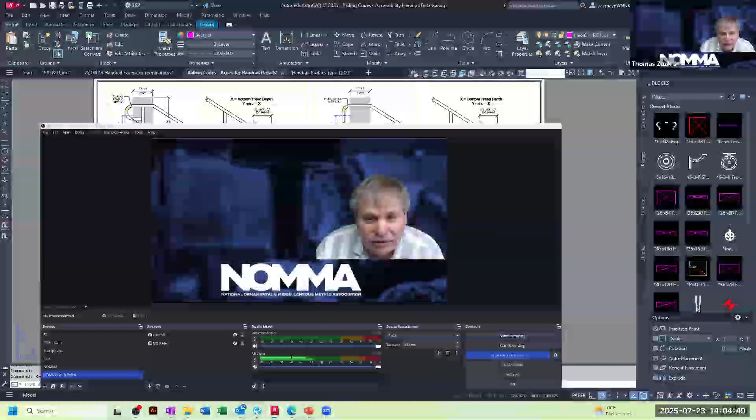So with that, one of the areas that I'm going to start with that is a huge hot topic is handrail terminations. Now, what you're looking at here is what I try to explain to clients, which are NOMMA members, mainly, what you need to do to be able to present multiple different aspects of terminations to your clients. Whether it's commercial or residential, your terminations are going to be very similar other than where they terminate.

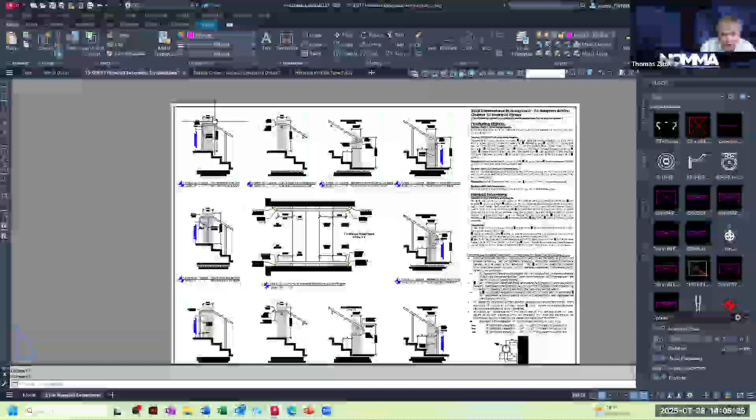So this page that you're looking at here is a breakout page of a stair flight with mitered returns and radius returns, and it is a breakout of all similar type terminations. Like if you have a radius bend commercially, per the ADA and pretty much most building codes today, and NFPA 101, you need to go your 12 inches at the top of the stairs before your inside of your radius starts to bend for your change of direction.

Same thing goes when you return it to a wall. At the bottom, here's a radius bend to the floor, radius bend to a post back.

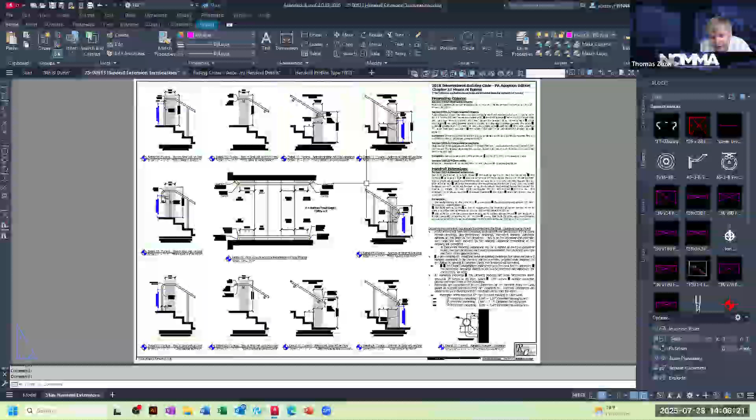And what this is that I've produced here for a client is a standardized page that goes in with all their submittals so that when they're being reviewed and the architect or the designer or anybody on the site, the contractor, looks at it, they know that you have taken the time to review and laid out your handrail terminations so that they comply to code.

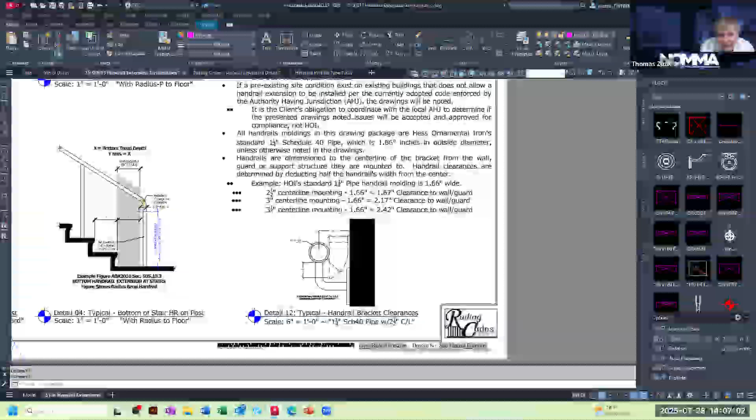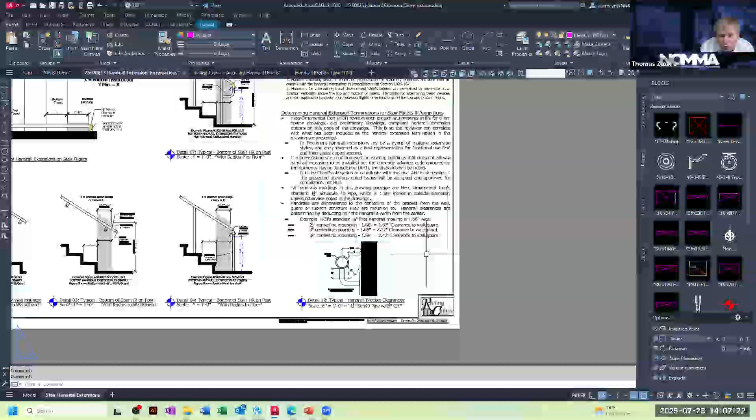For this client, we have the code adoption section plus the ADA plus, I'm not sure how many of you are familiar with handrail bracket sizing and the clearances, but the ability to list out this information. Now, why is this important? Areas of the country like Maryland, Georgia, Florida, I'm not sure how many of you on here deal with NFPA 101, which has got a 2¼ inch clearance between the wall or your obstruction and the inside of the handrail bracket.

One of the biggest problems that I run into when trying to help out fabricators is understanding that when an architect draws these details, you need to communicate that you're working off a center line, because your bracket standards, unless you're custom making them for the architect, pretty much most of you will probably see a dimension here from the side of the handrail to the wall or the guard or whatever it is that says 1.5 inches. And that's an incorrect way to designate the way that the handrail clearance is being reviewed.

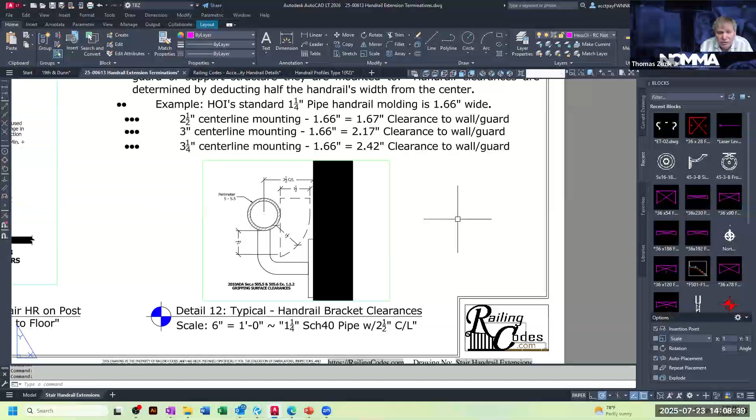And why do I say that? Because it's a minimum of 1.5 inches clearance. And most off the rack brackets that you all are working with start at 2.5 inches, go to 3, go to 3¼. Your larger 3 and 3¼ are going to be for when you run into NFPA 101 and you need a 2¼ inch clearance. Because if you're using a standard 1.25 inch Schedule 40 pipe for your handrail with a 1.66, which is what this is based on, and you have a 2.5 inch bracket, you can see here that you have the clearance of 1.5 inches plus.

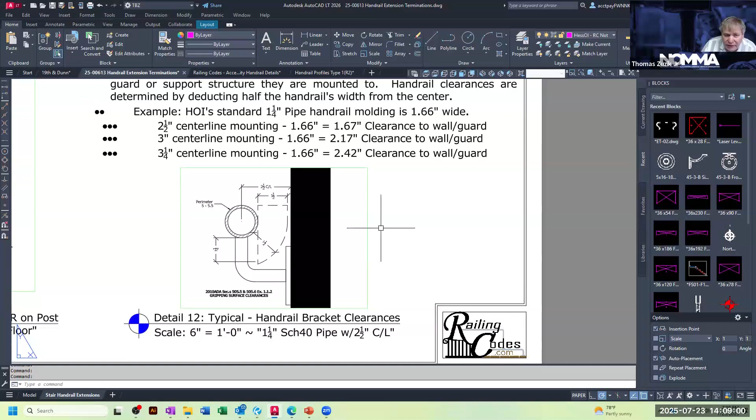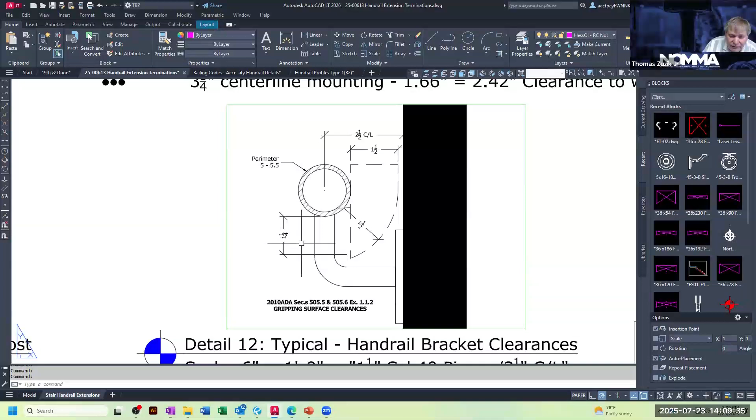And we'll get into this little radius portion down here in a little bit, but one of the other parts of the code and ADA and ANSI A117 and in NFPA 101, that's my reminder, I'm late, is that as your perimeter grows, every 1/2 inch over 4 inches, this height here at this measuring point for the clearance reduces underneath from 1.5 inches minimum to 1 and 3/8 inches to 1.25 inches to 1 1/8 to 1 inch, depending on the dimensions. And we can go over that if you have some more questions on that.

But this type of page in your submittals, when you're looking at your handrail terminations, will drastically reduce, giving your client and the reviewer at the architect of record, whoever's reviewing it, or the engineer, the building official, whoever's reviewing your documents, the knowledge that you have listed out and referenced back for your pieces.

Now, it's important to understand all these different terminations and how they affect, because some of you may have a mandrel bender, some of you may have a manual bender or a Hossfeld, and your radiuses are going to be different. But the key is to remember that your clearances, which are your minimum extensions, have to be met before you do those changes in direction.

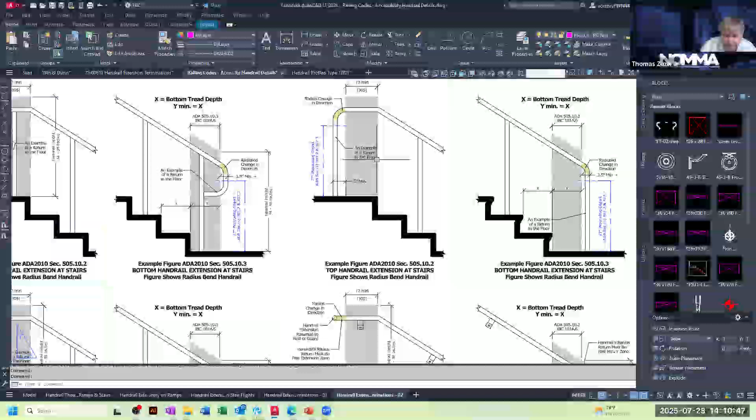Now, I'm going to give you a little bit of what I call an overload. This is the 2010 ADA, the 2017 A117, and pretty much anything that you're dealing with newer IBCs past 2018. But this is showing a stair flight that's got an open tread on the side and showing that these darkened areas here are on the landing. This is on the landing, this is on the landing. This line here is your break. This line here is your break. This is your landing. And this is showing all the pieces that you can go together.

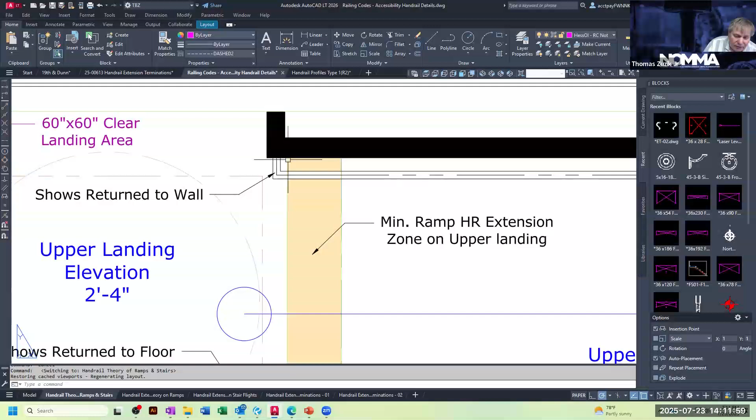One of the biggest issues that we find in reviewing that a lot of you run into is when you're at the top of a ramp, they don't give you this landing zone to clear with your handrail to the inside. And they normally will give you 12 inches from the break line to the end of the wall. Well, your handrail has to project past that because you have to get the clear of the handrail past that zone. Another important piece to understand is if you're dealing with a stair flight and a ramp that intersect, this is another one that a lot of people miss and get into trouble with.

How many of you actually know that you cannot connect the handrail of a stair flight to the handrail of a ramp that is in the means of egress for ADA compliance and A117? It is against the federal code and the law, and it is against A117.

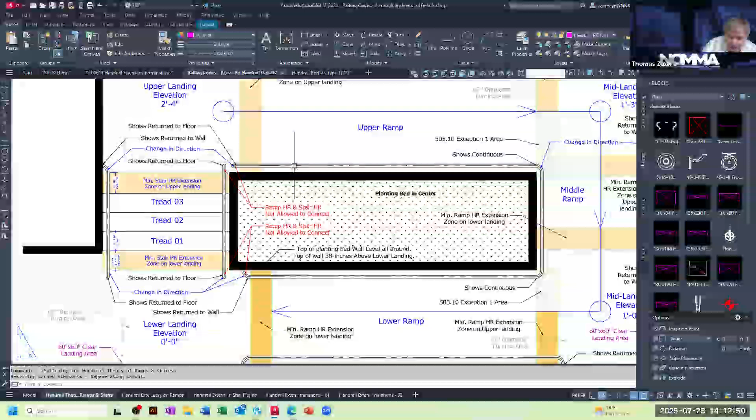These breaks are required so that the blind or the visually impaired know that they're done at the top of a ramp. They can be continuous from ramp to ramp to ramp like you're seeing here, but they cannot be continuous to a handrail. You can't connect the handrail of a ramp to the handrail of a stair. And I'm sure a lot of you work in areas where you have ramps that run around like this and tie into stairs, and they want you to connect. That is a compliance issue and one that is very largely missed out there.

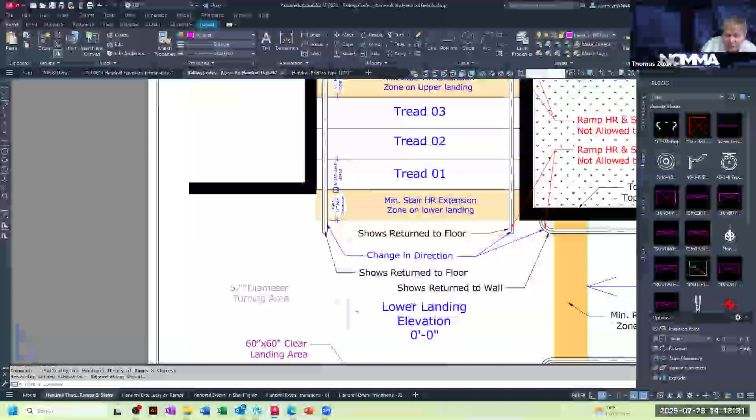Another one is where the bottom stair riser, your nosing point, is right at the point of a stair here, and then the return of a wall, and the architects will turn it before running it 12 inches, and it is not compliant. It needs to go out.

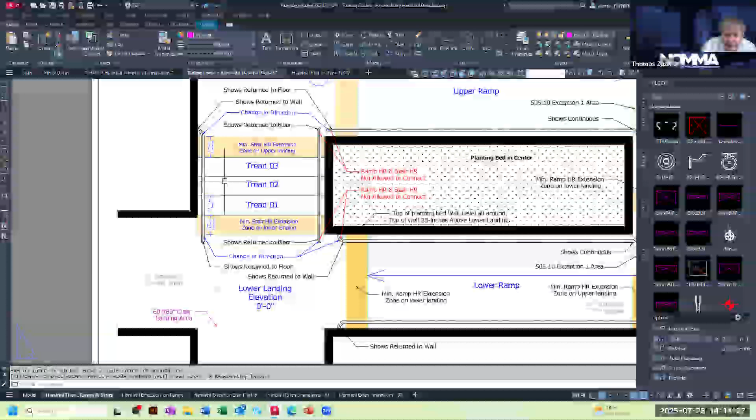Now, why is this important? Well, if the firm you're dealing with has a non-compliant design and you bid it and put it in, you own it. And as a fabricator, you need to understand that very strongly, that you're the professional. You need to know the difference between doing it right and doing it wrong. Doesn't matter if the architect drew it wrong. Doesn't matter if the building department didn't pick it up upon review. It matters how it's built and how it's installed. So it's important that you understand these termination points.

Okay. So where is that? Well, here's one on a ramp that you'll see a lot of times. Come down, point. Here is your compliant handrail extension. Here is your non-compliant handrail extension. This is no good.

Somebody chime in there? I don't see any hands.

Okay. Here's another one. This is an important one that a lot of people miss on. If you look here real tight, you'll see that this radius is turning into the wall before you've reached a minimum 12 inches. This is not...

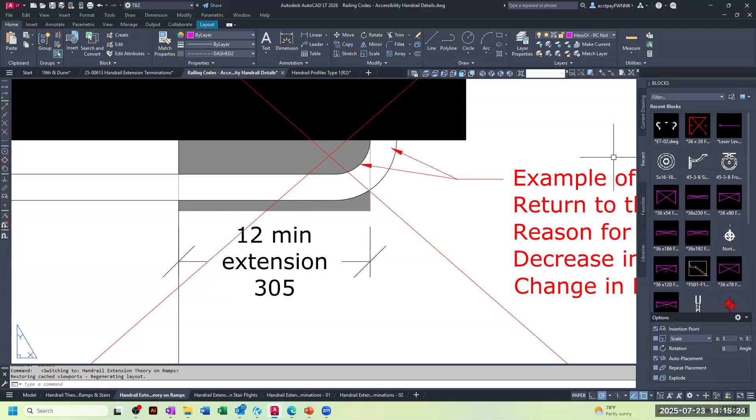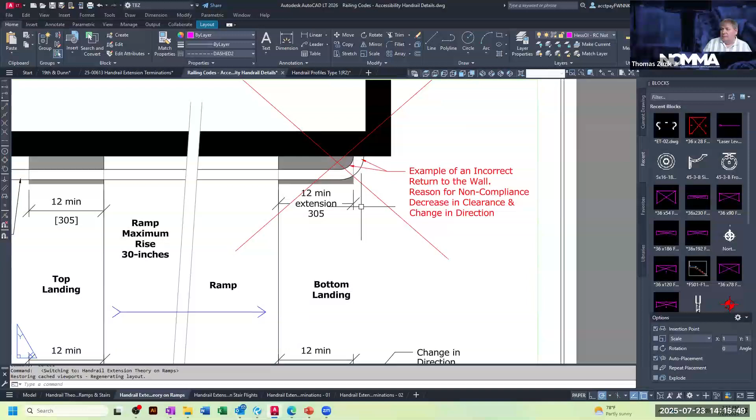So it's important that you understand that this is a huge factor that will come up. You may get past the architect, you may get past the builder, you might even get past the building department. If somebody falls, you're going to be on the hook for the non-compliance down the road. Okay, so it's very important. I get calls or emails on these at least twice a month for how do I talk to them to explain it.

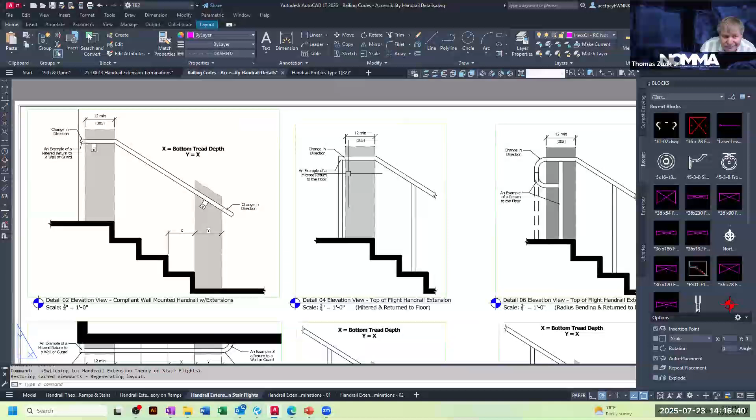So mitered handrails will get you a closer reduction because you don't have the radius, but they also give you this point, which is not good either. It's a trade-off. I always suggest a radius bend if you have the ability. If you don't, and you need the room, you can tie it in and miter it. It's not wrong, it's just playing on the safe side.

And here's an example of two compliant ones. Here's a mitered bend right to the wall, and then here's one that doesn't even go. There's ways to play with the different types of handrails, extensions, and radiuses, but for the most part, they're all the same. This is our handrail clearance, and these are the stair flights.

Before I move on to the next topic, I think Greg Terrell emailed me the question on the next topic I'm going to cover, which is stair width and stair flight width and handrails and clearances. But does anybody have any questions, or am I boring you because I've given this to you 18 million times? Can you hear me? Yes, go right ahead.

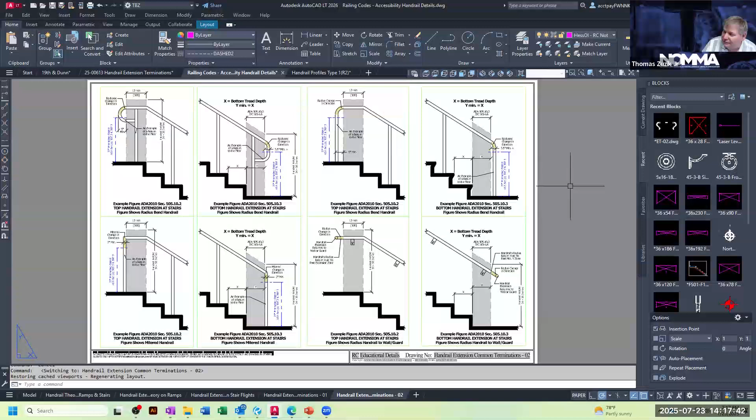All right. Can you go over the specific verbiage in the code? Because this comes up a lot in our industry where they don't give us enough room for that 12 inches. And if we have enough room, we try to go the 12 inches before our return to the wall. But I've had architects and GCs argue with me about the IBC code or the ADA code not explicitly saying that it's a turn in direction in the handrail.

Technically, they argue that the handrail is still extending forward in the direction of the ramp because the verbiage in the IBC code says the extensions of handrails shall be in the same direction of the flights of stairs at the stairway and ramp runs at the ramps. They argue that bend is still going in the same direction as the stairway, and as long as the bent area is still above 34, within that 34 to 38 handrail height, even if it's within the bend downwards or toward the wall, that is still code compliant.

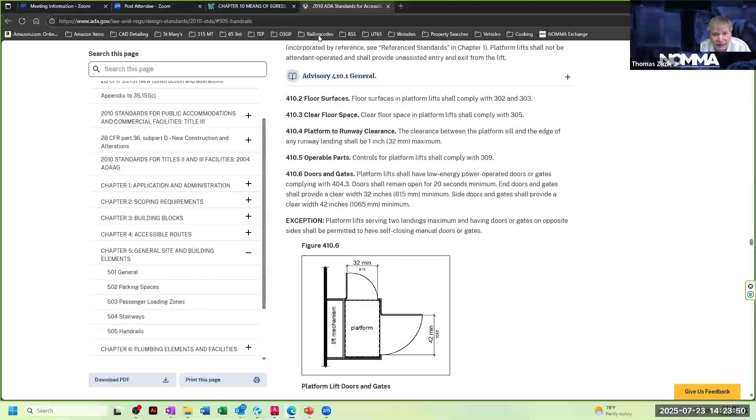Now, if we take this information that we just spoke about, and we interpret the change in direction, and then we go to the Access Board, chapter 5, stairways.

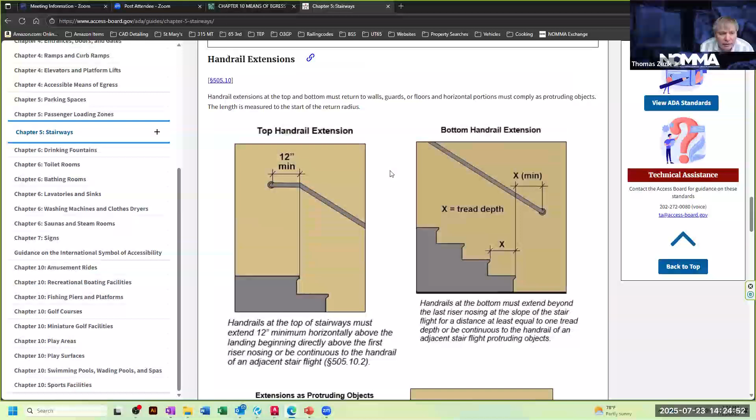Sounds good, because we have it, they push back a lot on this, and I've actually had people make pretty good cases that the handrail return to the wall, technically the railing is still continuing in the direction of the ramp or the stair, and that graspability, the IBC 2024 code that you brought up before, does attempt to clarify that.

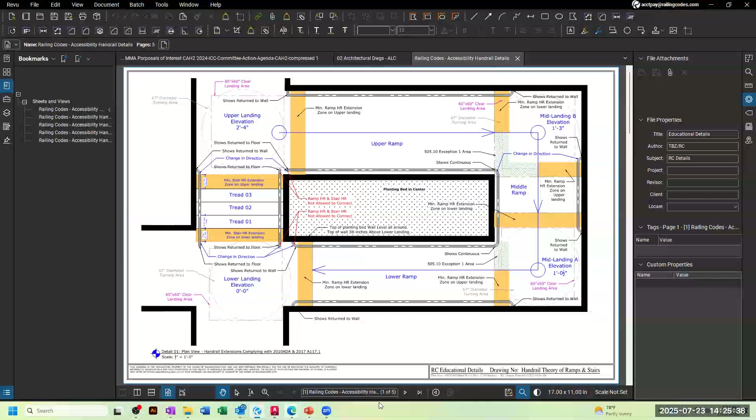Just so you know, it does actually have that, if you jump back to that IBC code you had up.

So it says, shall extend the required minimum length before any change in direction or decrease in clearance required by those sections. If you go to section 1014.8, it actually has an exception for the decrease in clearance due to the curvature or angle of the handrail returns shall be allowed.

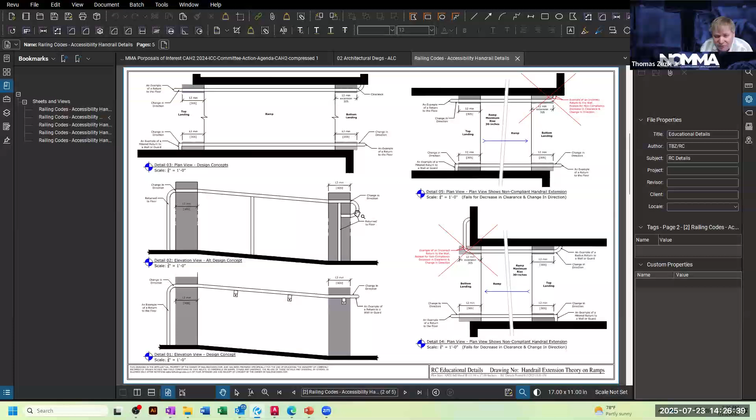That was clarified in the last code cycle and removed. Just so everybody understands, I'm working with the editorial committee for ANSI A117, and the figures you're seeing here will be in the next publication of the A117, showing that you have to make these before you hit these clearances. So this is not new, it's editorial, meaning it doesn't have to go through the code review process because it's editorial to be closer to the text.

And figures are non-enforceable. This is an important part for everybody to understand. Figures, which these are, are not enforceable for the ADA, A117, the IBC, or any of that. It's the text. And that's what the architects don't seem to get, they try to poke holes in the text versus understanding what the actual text says.

And they can say, okay, well this is the way we interpret it. And when you say to them, that's an incorrect interpretation that we know through talking with the code consultant, are you willing to go out on a limb and bet your reputation on it? Because the lawsuit's coming to you. And 9 times out of 10, which is why I go back to, if you give them...

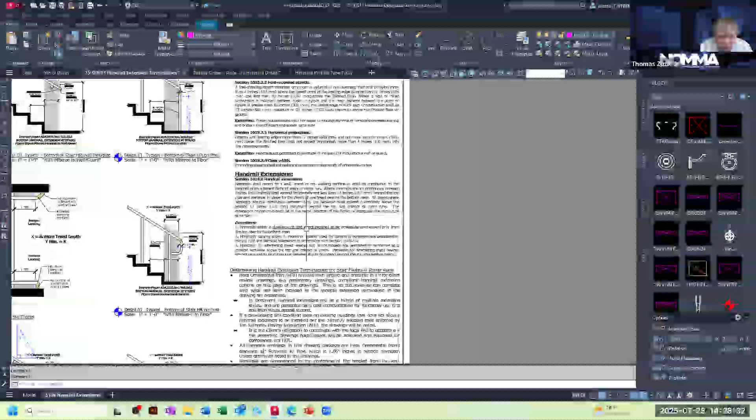If I can find it... oh here it is, I'm sorry. If you give them a sheet like this, which has the text, this is the 2018 IBC for PA, with the information, and you list it all out along with the ADA and the compliance issues, if you put this in your drawings and list it in that manner...

And add references to the interpretations that I will suggest you get from the access board. You won't really get one from ADA because it's federal, you're dealing with a lawyer and they're not too helpful. But you can go to the access board to get an interpretation.

And if everybody doesn't know, that's the US Access Board. They published a guide to the ADA accessibility standards. You can always go to this technical assistance. I know a couple of the people there, they will get back to you. You can email them or call them. I suggest you email them with your information and what you're calling on.

And 9 times out of 10, when you're dealing with an architect, when you get an interpretation back from the access board that says they're wrong, they cave. And that's the easiest way I can tell you to start fighting handrail extension issues.

I don't know if the guys from, I think it's Schickel, one of them, they ran into this a lot, and once they got their interpretations down, it started going away. But a quick call works, and an email, they get back to you normally within 24 to 48 hours. Any other questions before I move on?

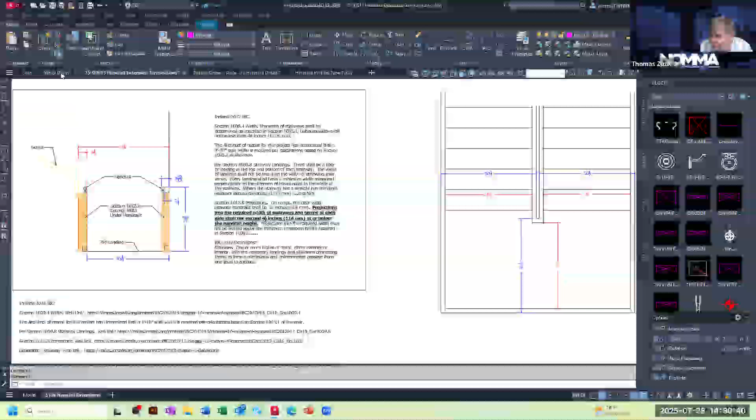So, one of the issues that a lot of people have a hard time understanding is, where do you measure handrail or stair width? How does the handrail fall into it? And stairs are different than ramps.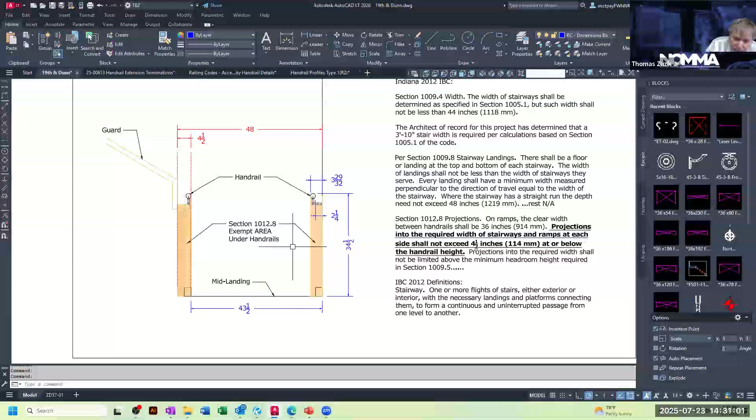This was an interpretation I did up a while back for another NOMMA member. They had built a guard and they were getting hit because of where do you measure the width of the stairs from? So when you're measuring a stair flight, you're measuring above the handrails...

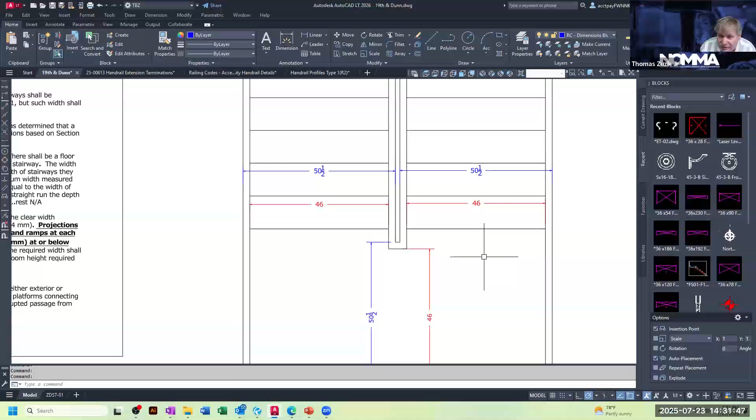...between the guard and the wall. So if you have 46 inches between your guard and your wall above the handrails, and your minimum width requirement is 44 inches, you still have to maintain that 46 inches on the guard between the wall and the guard.

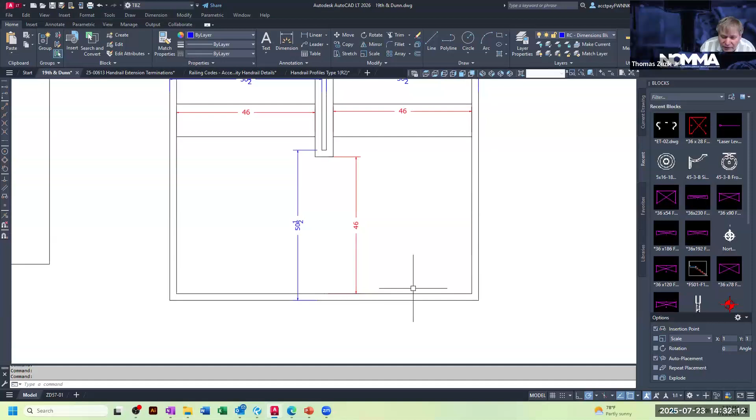However, what a lot of people don't realize is, if you don't have a wraparound handrail and you have your stringer above the floor level at the landing, you're actually measuring to that point under the guard above the handrail at your wrap. So how does that look? We'll do a cut view here, and I'm just going to take this portion out for a second.

So here's your stringer at the inside. Here's your stringer around the outside.

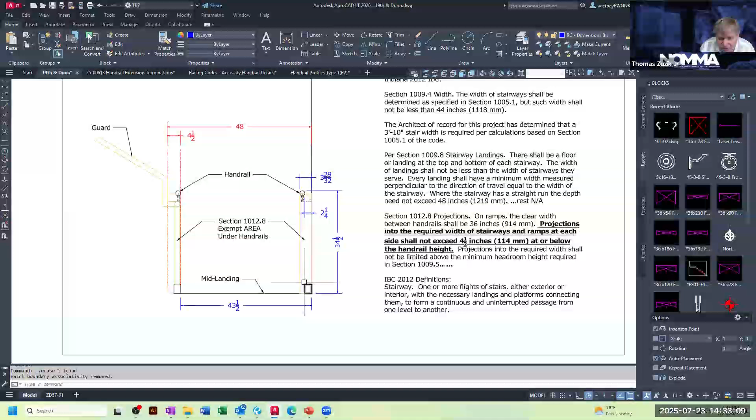The stair width has to be maintained between the guard and the wall above the handrail coming down the flight. At the mid landing, you have to keep that same 48 inches. So if you don't have the handrail here, you don't get to use the wall. You have to use the stringer, because this is where the wall starts. It has a setback because there's no handrail here.

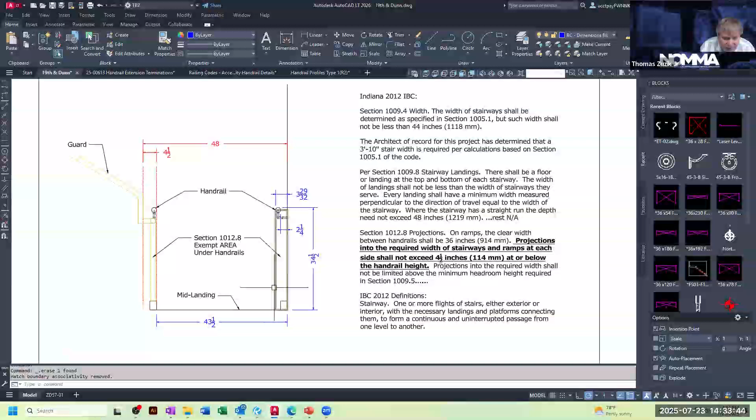I'm not going to read this fully out for you, but the highlighted portion here shows projections into the required width of stairways and ramps. At each side, they shall not exceed 4.5 inches at or below the handrail height. So the handrail's allowed to come in to 4.5, whatever it is, and you're allowed to put a level on the inside of that handrail, and everything below it, even though it's in the landing, is no longer required not to be there.

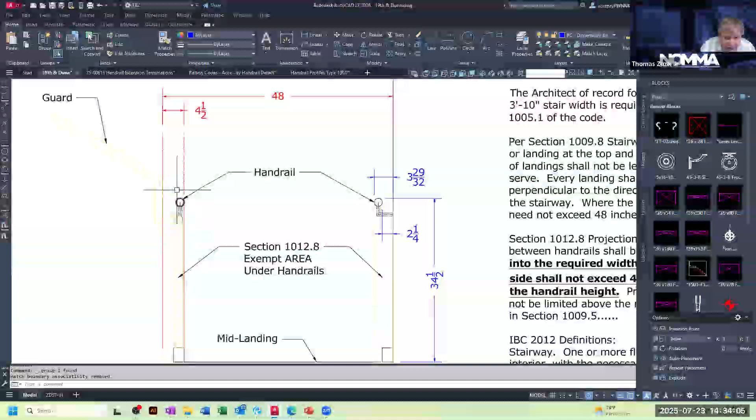So now, in this case - I forget who I did this for at the moment - their problem was they had the guard here in line and came up, and their handrail wrapped around the inside. So they were measuring 4.5 inches closer, so they were 43.5 inches to the wall, to the guard, not 48. So they actually had to modify their guard up underneath, come back and come up, and add this little knockout at the return, which was this small piece in the guard right here, so that they could use this measurement above the handrail here and above the handrail here to get their 48-inch clearance.

Greg, did I cover that pretty good for you on this? This is an important piece to understand.

And this all falls back to the required stair widths. I'm not sure how many of you have actually seen this section, but when the architects calculate it, they have different areas within the building. They'll build out a table and it gives them allowances per person, how many square feet they need for each type of location. So like an educational classroom area, you need 20 square feet per person in that room.

Business area gross is 150 square feet gross per person. Assembly without fixed seating, unconcentrated, is 15. Assembly without fixed seating, concentrated, is 7 square feet. Kitchen, for every 200 square feet you have in a kitchen - it's a gross calculation. Library stack area is 100 square feet per person.

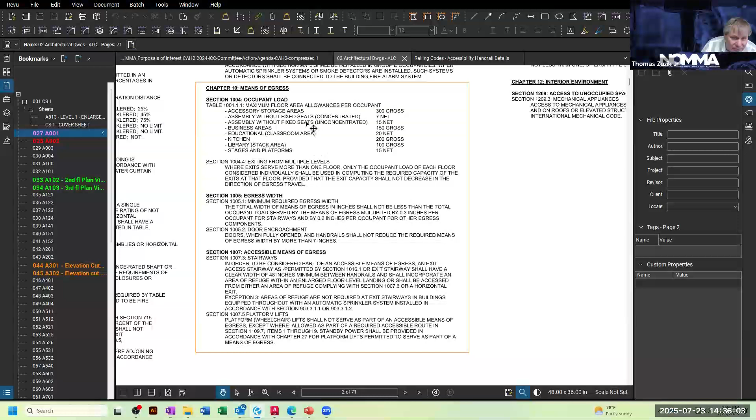So what you're dealing with here, when it's then overlaid into the building plan, you'll see here that they have 80 seats, 87, 82, 80 seat, 81, 82. The 80 seat is what they're designating they're going to put in there. The 81 and 82 are the calculation that they did for the room square footage.

And then you'll see they have these dots in the furthest part of the room, and they come this way and they go down, and they come this way and they go down, and they go into the stairwell. And they add up all this information. They're splitting this room in half, 120 seats - they're going to put 60 here and 60 here, or half of 126, 63 and 63.

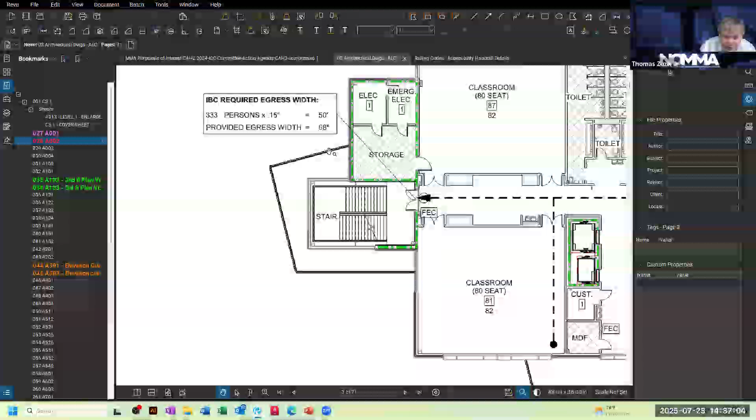But they're going to take that, and it's counted out that they came up with, on this floor level, they have 333 people times 0.15 equals 50 inches for the minimum width. So the minimum width is 50 inches. The minimum clear width of the stair flight is going to be 50 inches.

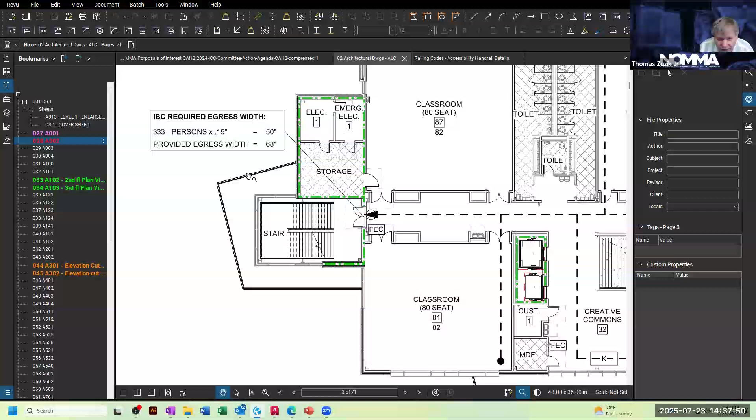It's going to be based on the largest amount that's hitting this stairwell, and floors don't stack. So if you have 333 people on this floor and the one above has 400 and some, it's going to take the largest number in the stair tower that's connected, and use that for the minimum width. They've provided 68 inches, so the minimum width is 50, they've provided 68, and the stair flight is based on the 68 to come down.

Now, what's important to understand is you'll see that there's a stair flight here right in the middle of this open area, but there's no dotted line going down those stairs because that is not a fire egress stair. That is not your exit access. This stairwell is the designated exit area, not this.

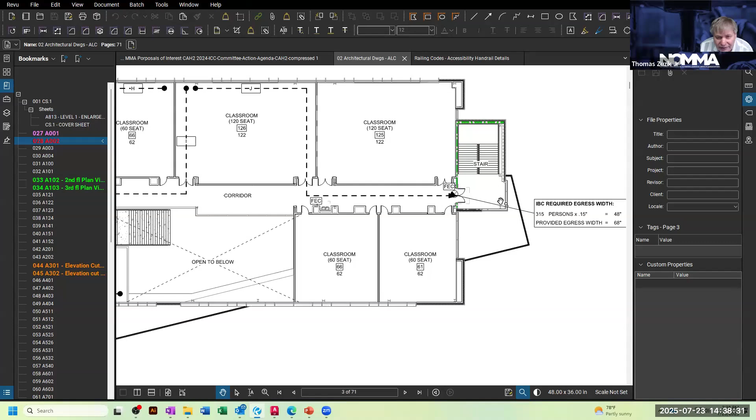And when we go to the other end of the building, you'll see that this one goes this way. And then they don't have them for here, but they know that these have to be calculated in. And when we look at them over here, we got 315 people. So if we start adding all this up, we'll see we get to the 315 people, okay?

And then it comes down this stairwell. Then when you go down to the first floor, you'll see, again, we have these breakouts, and they calculate the number of people with the required and provided widths, okay? And if the stairs entering into here and the stair is wider, then this width is going to be wider here, but this could be narrow here.

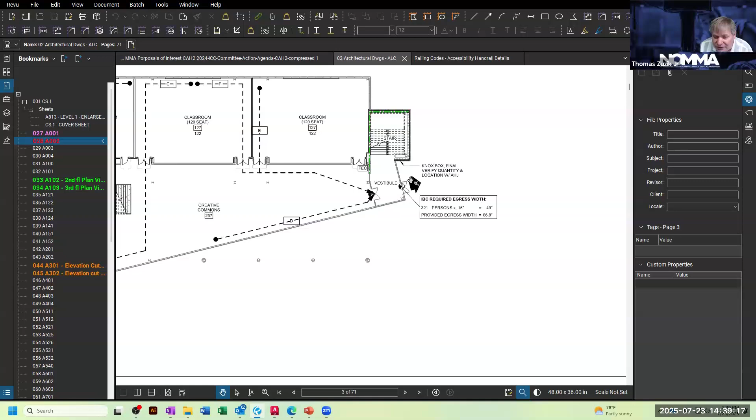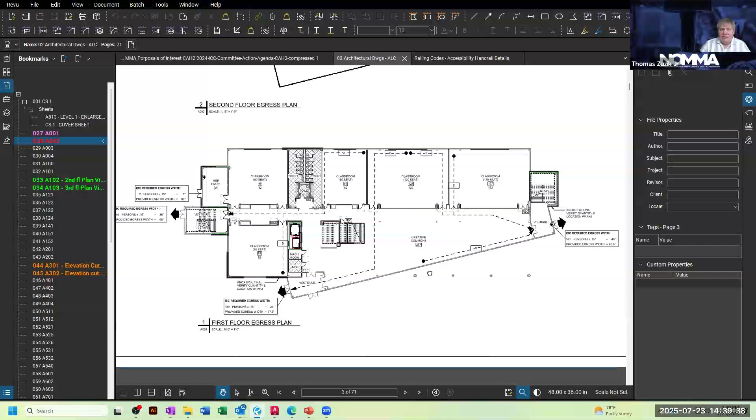Here's your stair. Here's your exit out. Here are your exits out for here, going out to here, the equipment rooms. This is where all that stair width that you deal with is calculated, and how you have to understand that sometimes architects will make the width bigger just to plan for the future.

Now here is an elevational view of that same plan. And you can see stair tower on this end, stair tower on this end, and here's that convenience stair that is not allowed to be used for your designated means of egress. Okay? Everybody get that? Follow where I'm going with that?

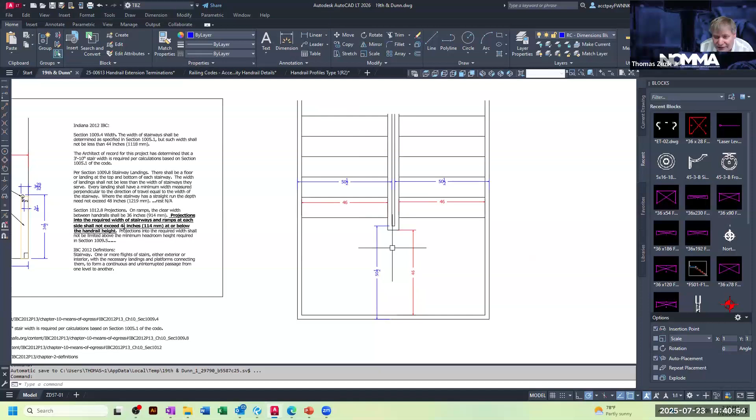So when we go back to this information, knowing what your minimum width is calculated as is important, because these stairs here could be 50 inches. Let's say it's calculated and you've got 44 here, but you come over here and you got 48, that's fine, because the mid landing can't be smaller than the stair flight. Okay. And these are all the code sections for that. All right.

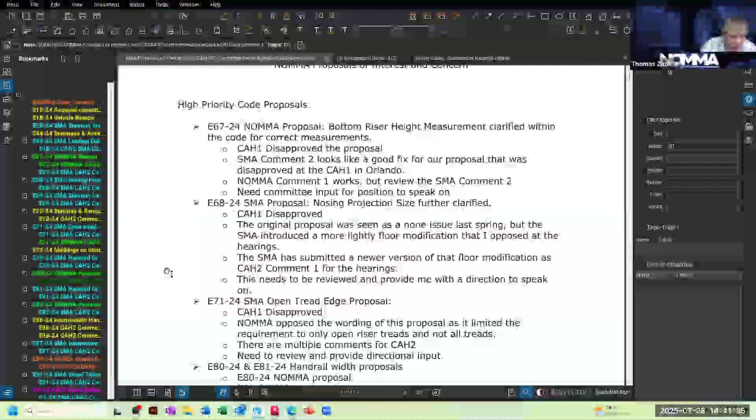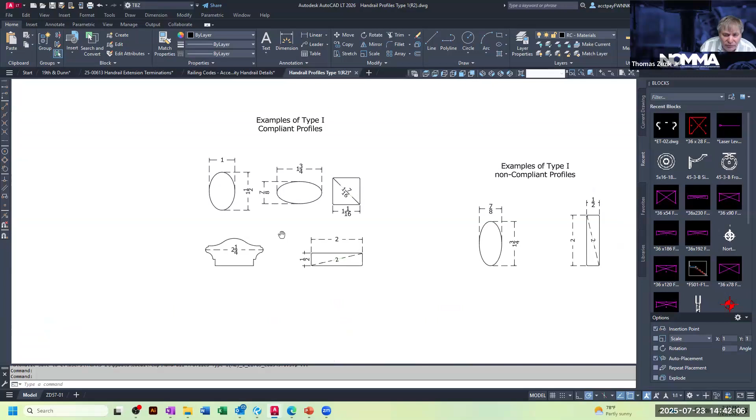So let's move on to some new stuff coming down the pike. Interpretations that are out there. Handrail profiles are a big issue. What's compliant? What's not compliant? How does it work? What can you use? How many of you run into issues with using a traditional Dixie cap for like a ramp? They say you can't use it. It's not a round or an oval or a rectangle in those manners.

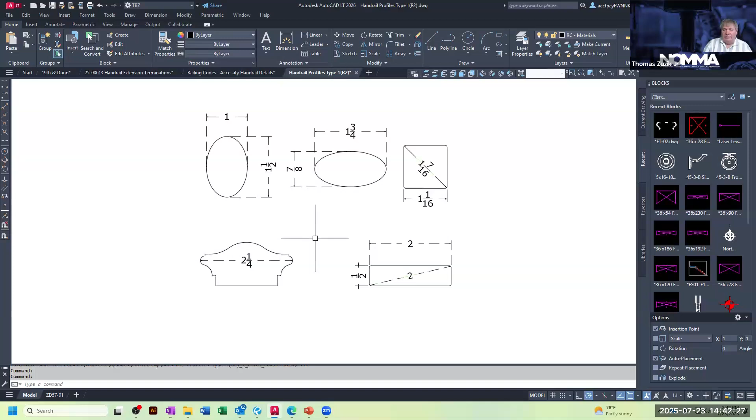The type 1, type 2 classification, when you're figuring out a handrail profile and its handrail bracket, this is one of the biggest misconceived information for your vertical clearance under your handrail profile. We were talking about the calculation for the handrail, and

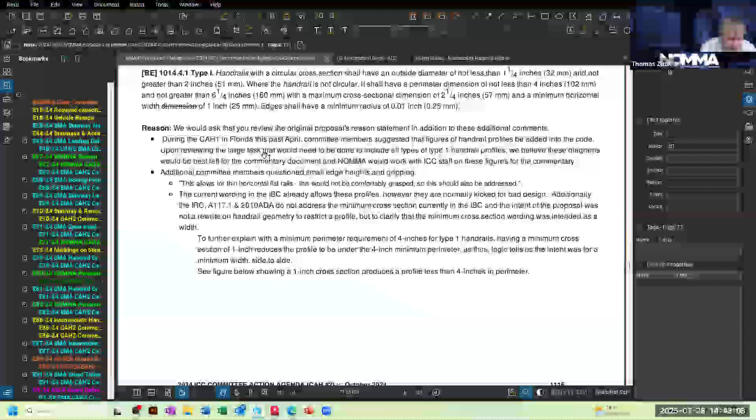This is not the one I want. I apologize. I apologize, everybody. It closed out on me.

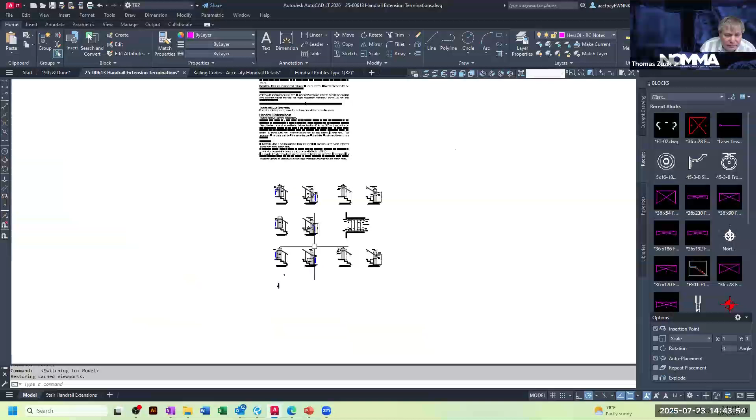So one of the biggest misconceptions is the calculating handrail clearances that we were talking about before with the profile and the reduction of this area underneath, which is the vertical clearance. And see if I can find it in here. Nope. So the section in the code that we want to look at

is in ADA, it's in 505.6 gripping surfaces. This is where the designated gripping surface horizontal projections shall occur 1.5 inches minimum below the bottom of the handrail gripping surface. Exception 2, the distance between the horizontal projections and the bottom of the gripping surfaces shall be permitted to be reduced by 1/8 of an inch for each 1/2 inch of additional handrail perimeter dimension that exceeds 4 inches. So that 1.5 inch minimum till this projection comes out can be reduced by 1/8 of an inch for each 1/2 inch of perimeter.

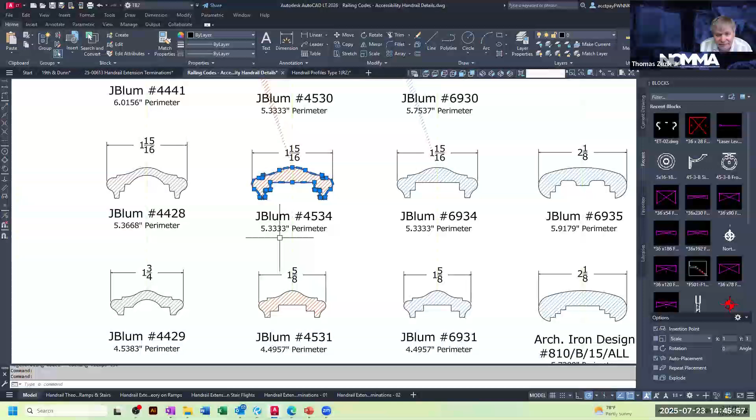When we go back to our profiles, here are some different profiles, and you'll see that the Julius Blum 4534, this is the perimeter, all those dotted lines. It's not a direct line across here. So you count all that distance. Now, if I take that and I put it on top of a flat bar or something else in that manner, we'll see here with that added, the perimeter is 5.333. It didn't change much.

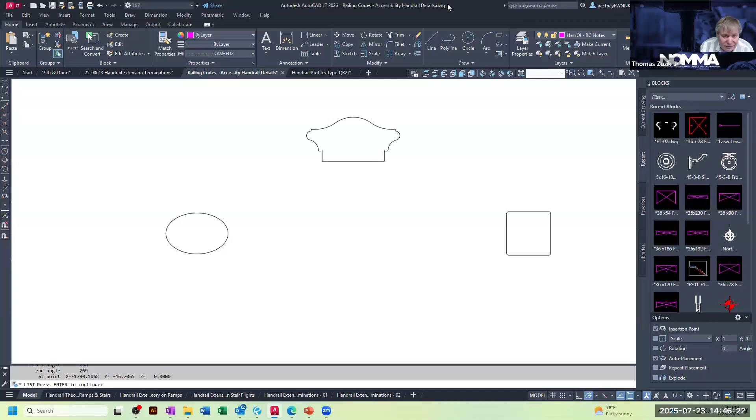Well, why is that? Well, instead of going in, it went out. But the 5.33 helps us. Why does it help us? Well, we know that 5.33 that we have here for this handrail profile is going to get us a 1/4 inch reduction, because it's 1/8 for 4 to 4.5, 1/8 from 4.5 to 5, and we're not at 5.5 here, so we're not getting our extra, but we're getting a 1/4 inch reduction on this height.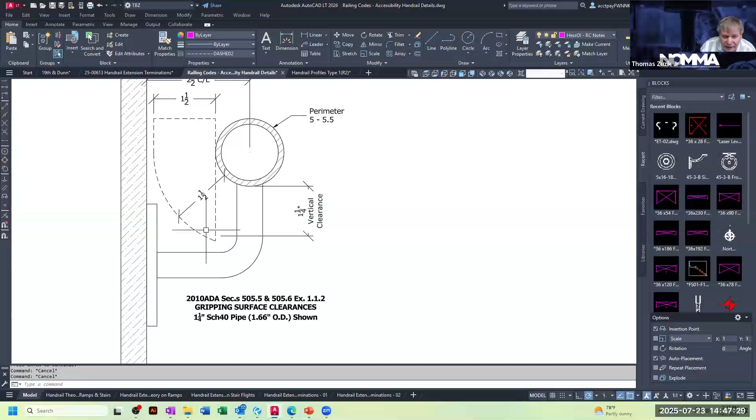Okay. And when you're using a handrail profile, typical Dixie cap, with a flat bar underneath, you can get a reduction and get into those other handrail brackets that don't have the true 1.5 inch like you'll see in some of the off-the-shelf catalog pieces. And depending on what their projection is in those bends, you have to do your clearance from the 1/2 inch, 1.5 inch from the actual side that's inward.

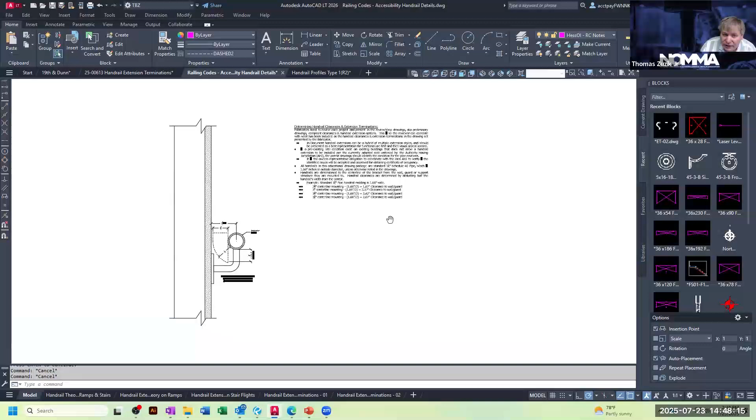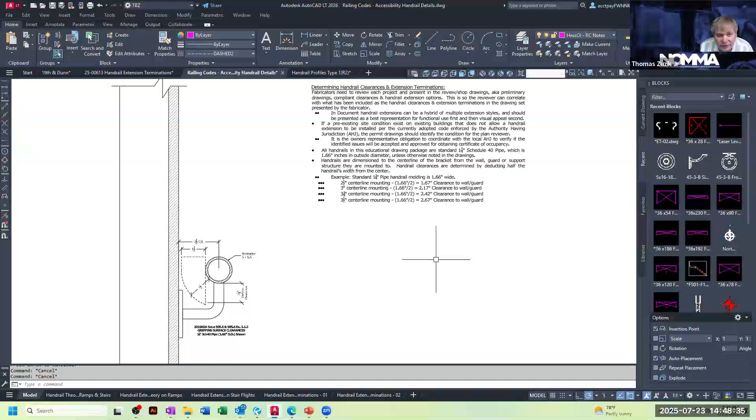So if you have a wider piece here, like a traditional cap, that's going to go into the wall with a 2.5. Whereas if you have a 1.25 inch, which is a 166, you're going to be able to use a 2.5 instead of a 3-inch bracket. And these are common mistakes that are very prevalent where a lot of your fellow fabricators get hit. I know this is like watching paint dry, but these are important factors that you need to understand with handrails.

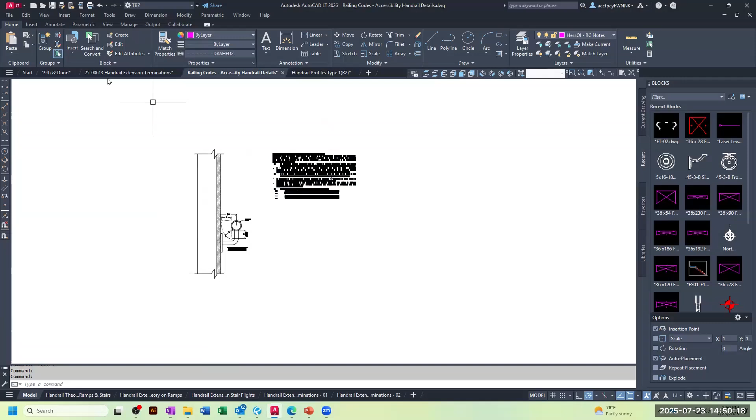Just a quick one on your stair clearance. If you can jump back to your tread width and landing clearance. Did you say that if there's a handrail that wraps around the landing, you can measure all the way to the wall, but if there is not a handrail wrapping the landing, you have to measure to the back stringer projection? Did I hear that right?

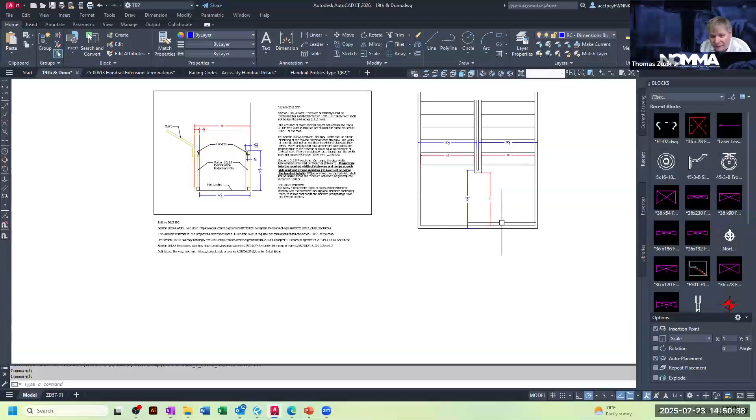That's correct. If this handrail is not wrapping around the entire landing, so if your handrail is coming out and terminating here and coming out and terminating here, you have to use this inside stringer edge. However, if your handrail goes continuous around the whole entire piece, then you can use the wall above and gain the extra 2 inches or inch and a half, whatever your stringer thickness is at the wall. And which specific code verbiage refers to that?

Well, where it is, okay, is stair width. So it's a multi-part reading, okay? And the stair width is measured, let's see here, handrails height required. Lateral location. It's a new one, came out in the latest. Continuity, fittings, extensions, clearance.

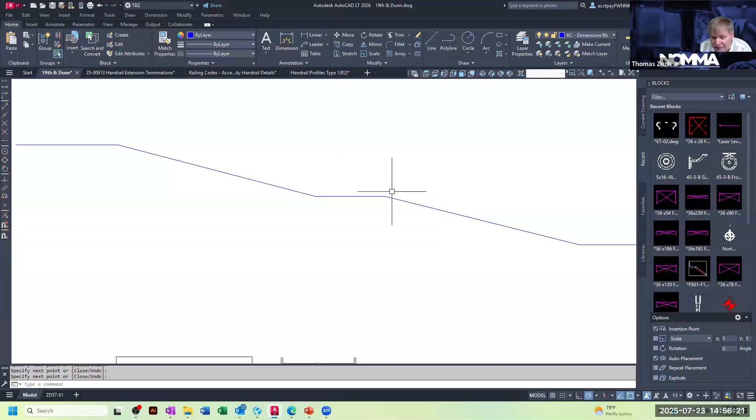But I believe if this is under 7 or 8 feet across a mid landing that is continuous and straight, the handrail has to be continuous. But I'd have to find that text for you on that. I don't know who asked that.

But as long as you're able to have a mid landing that you can terminate handrails on, then technically you don't have to be continuous, but there is an obscure one for small mid landings that they require. An example, and it's only in straight runs, because one of the big things that they're looking at right now, that we're looking at editorial-wise,

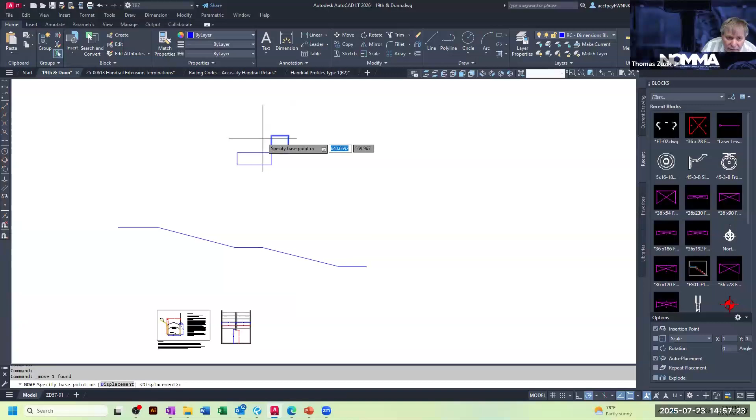is how many of you run into a ramp where you've got a 90-degree turn at a mid landing like this. So you come into the ramp and you're coming down, and then you're coming into the mid landing and turn, and then you're coming down. This is an accessible route, which means that if this is 60 by 60, and this is the break on the ramp right here where you level off onto the landing, this is going to be non-compliant.

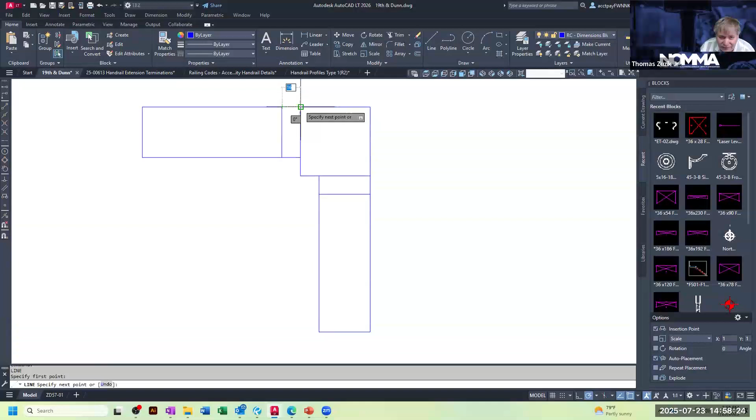This is going to need to be pulled back a minimum of 16 inches. And this is going to need to be pulled away a minimum of 16 inches. And the reason this is the handrails, if they enter into here, reduce the minimum 60 by 60 width. So you need to have your ramp come down and your handrails terminate into the walls or floor or whatever it is before they enter into this area. So that means 12 plus the width of your handrail material, which we're going to say 2 inches. So you want a little bit of playroom, which is why I said 16. So this is level. This is level.

Now, if you bring the handrail and run it continuous through here, you have violated the 60 by 60 square inch area. This is something I could spend a whole lot of time on when you're looking at ramps, things that you need to look for to see if there's even enough room for you to put on your handrails for compliance. And this specific figure that you're looking at is being changed in the upcoming 2027 ICC A117.1 publication. It will be changed. You'll see it corrected there in the figures.